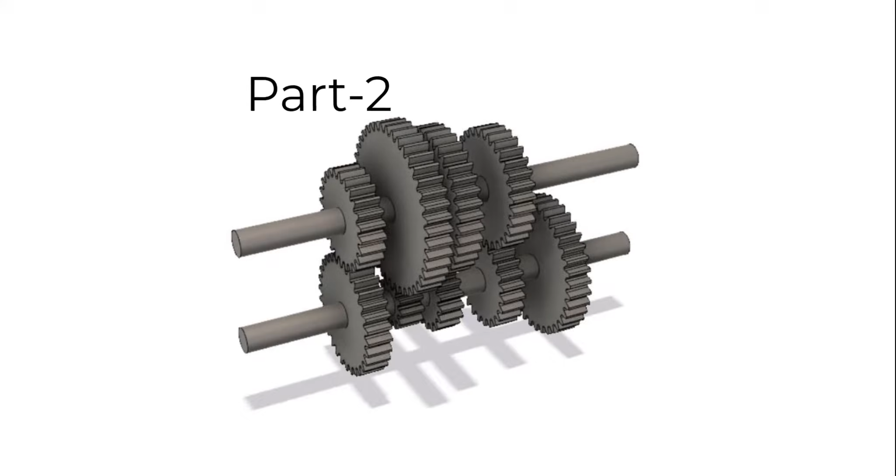This is part 2 of Constant Mesh Gearbox. If you have missed part 1, I strongly recommend you to watch part 1 now. You'll find the link in the description.

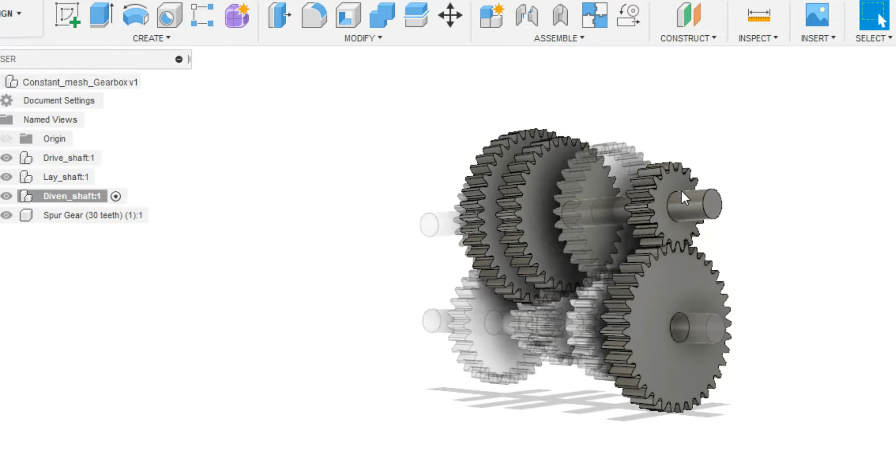We almost designed it. Just a few more steps left. Begin by activating the driven shaft and select the end face of the driven shaft. Then choose sketch. Draw a line. Convert it for construction after selecting it, followed by X on the keyboard.

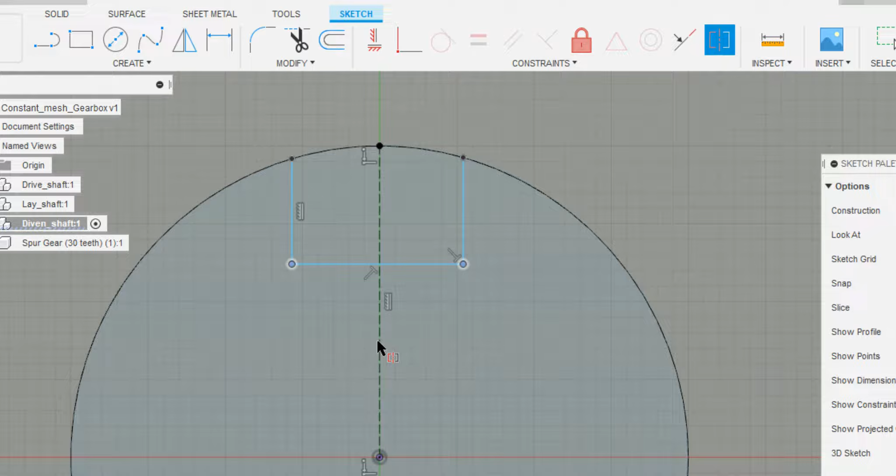Now draw the profile of the spline roughly. Make the profile symmetric from bottom. D on the keyboard. Let the length of the horizontal line be 4 mm and the vertical line be 3 mm. Now choose pattern under create menu.

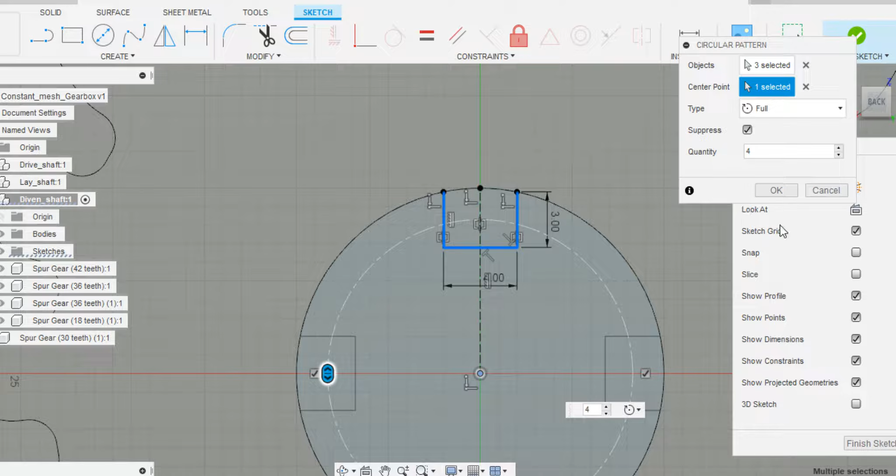Select the spline profile as an object and select the axis point as center point. The number of splines be 4 and click OK. Now select all 4 profiles that were created and press E on the keyboard. Extrude all the way to the end of the driven shaft.

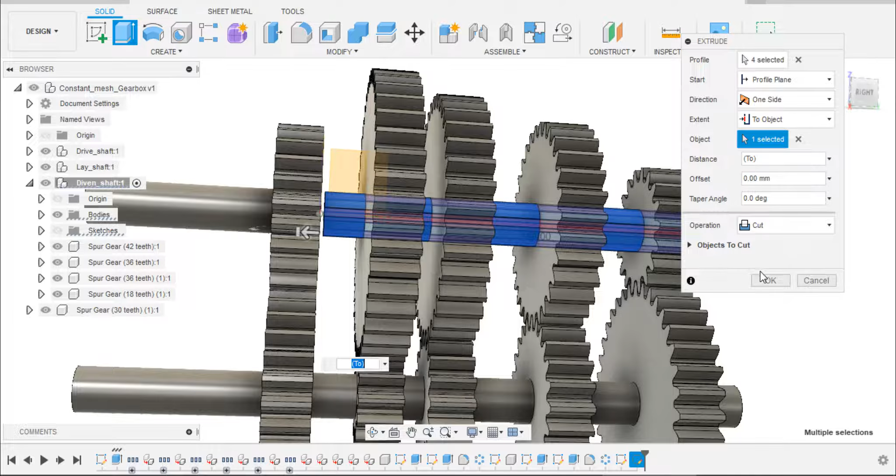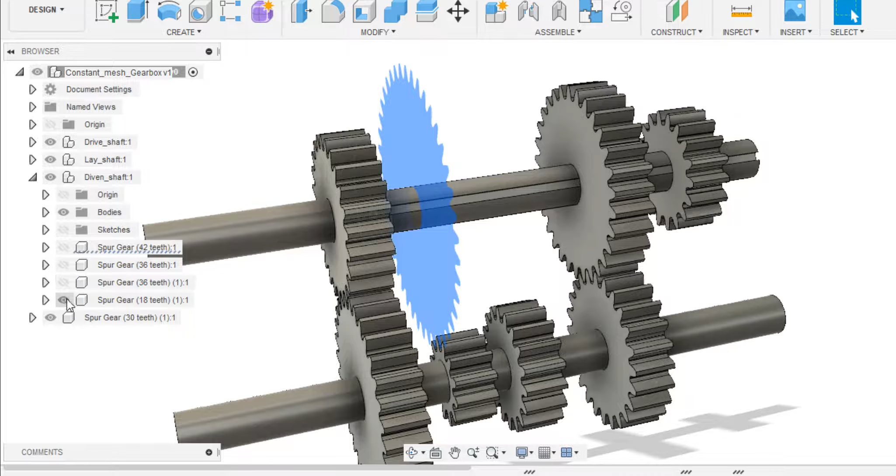Make sure that only one body is going to cut. Click OK. Activate the top level assembly. Now disable all the gears on the driven shaft. Move the component to the driven shaft.

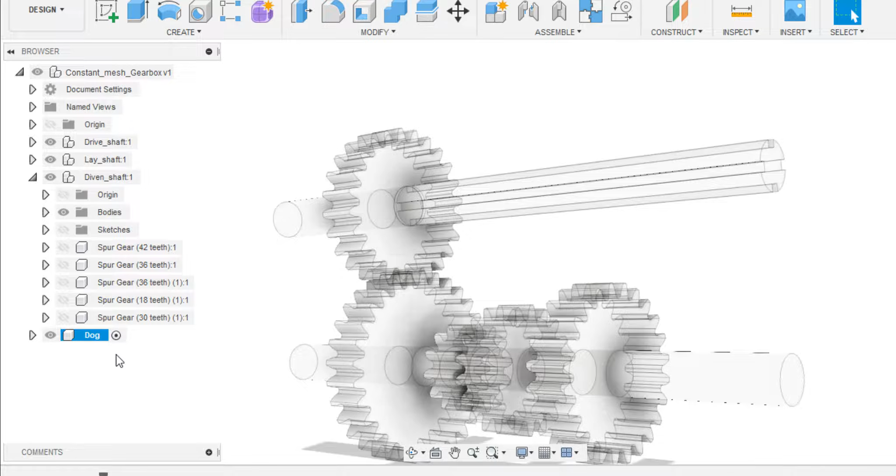Create a new component and rename it as dog. Select the other face of the shaft for sketch. If you are unable to select the face, just hover the cursor onto the face and hold the left mouse button. You'll get a bunch of options. Hover and select the desired face for sketching.

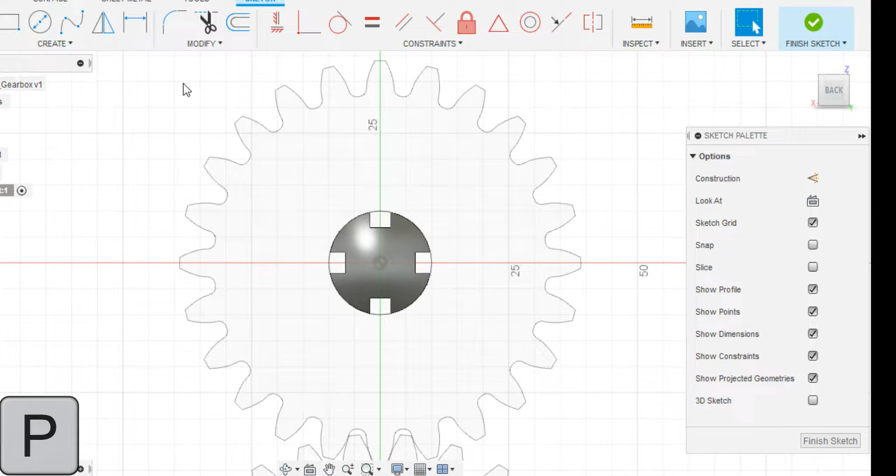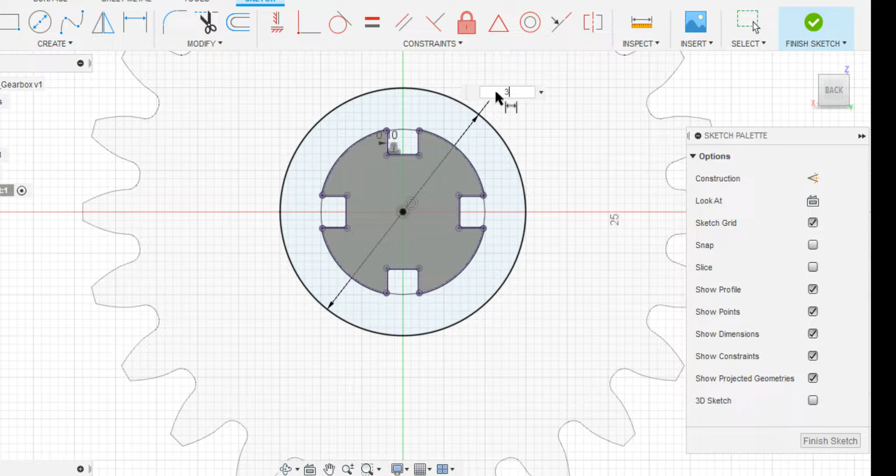P on the keyboard. Select the previous sketch profile and click OK. Now I want you to offset this profile to -0.1 mm. Then draw a circle. D on the keyboard. Let the dia be 40 mm. Pay attention here.

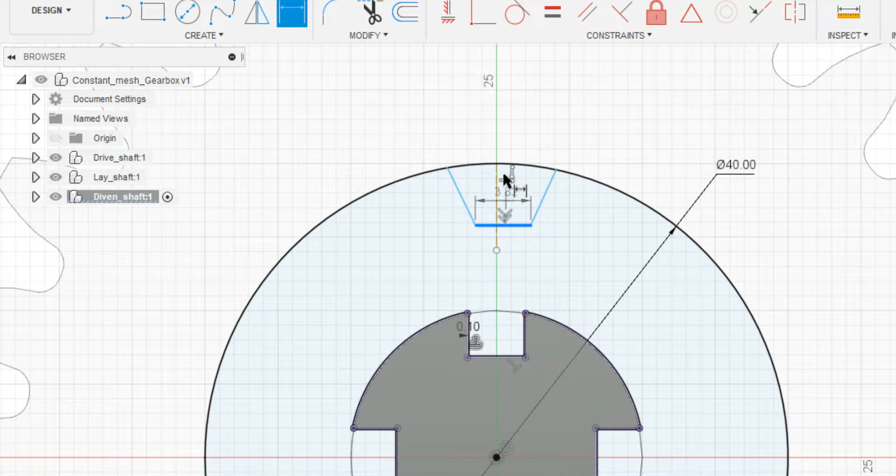Draw a line and make it for construction. Now draw a simple profile like this. Let the distance from bottom line and the top point in the circle be 5 mm. Make the profile symmetric from bottom and top.

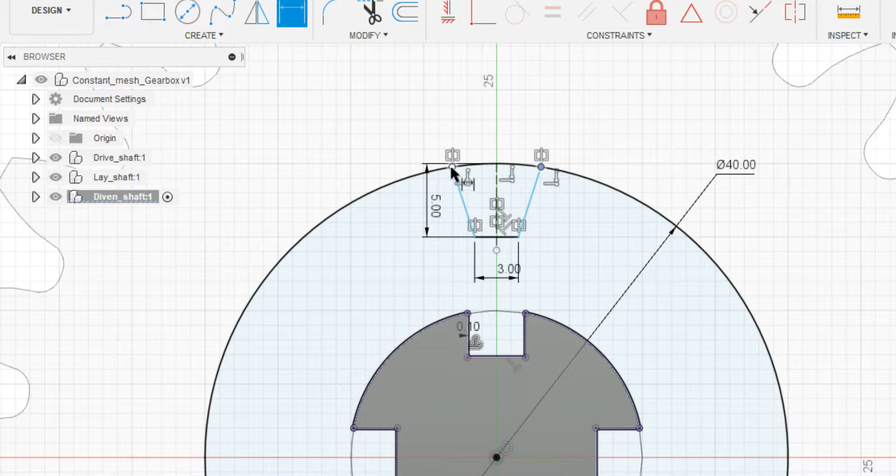Let the horizontal line length be 3 mm and distance from top points be 5 mm. We're done with the dog profile. Now select the profile and select circular pattern. Choose the circle center point as center point. The number of instances be 8 and click OK.

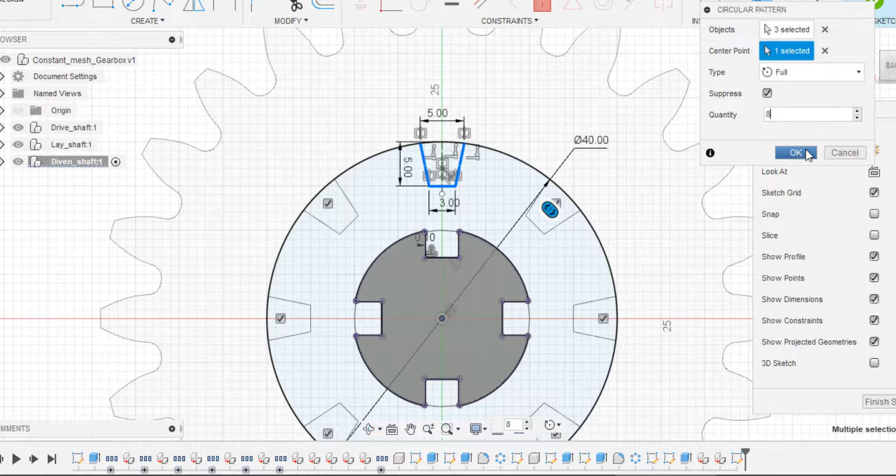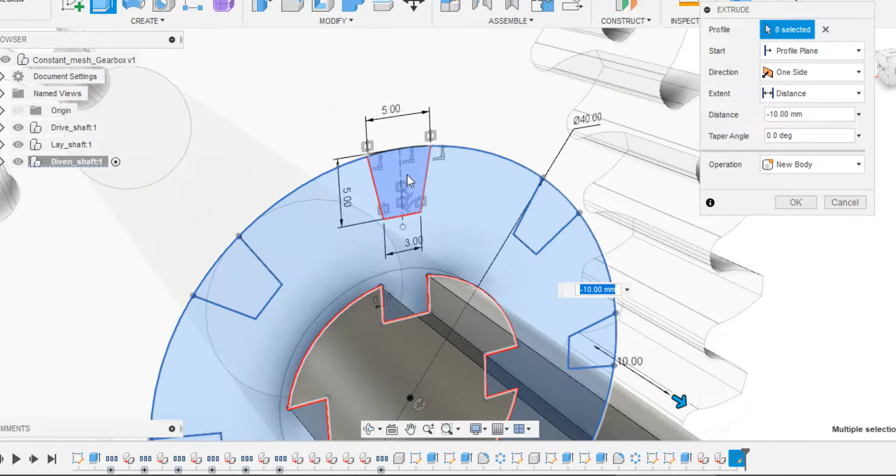Q on the keyboard. Select the inside profile, including the outer profiles for extrude. Let the extrude distance be -10 mm. And then click OK. Enable the previous sketch to create partitions on the dog. Hide the drive shaft to select the profiles more conveniently.

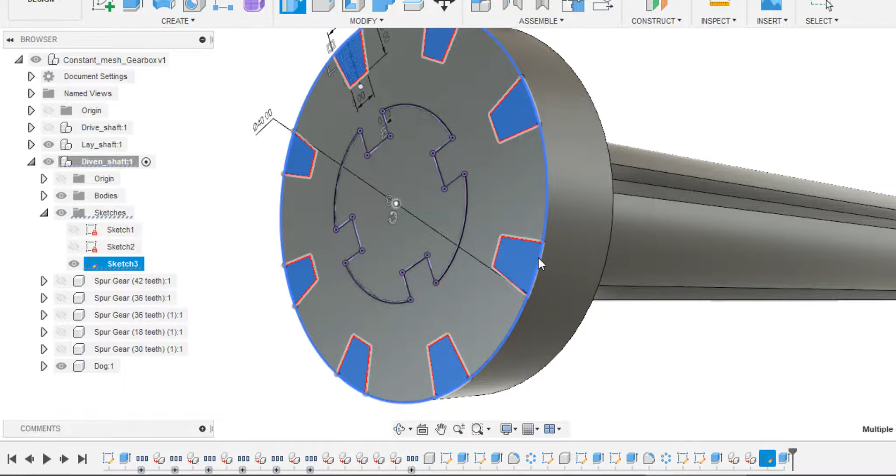Now select all the profiles and press E on the keyboard. Inside the extrude menu, under direction, set 2 sides. Select the manipulator and roughly adjust it. Make sure that the operation is joined. Side 1 length be 5 mm and side 2 length be 15 mm.

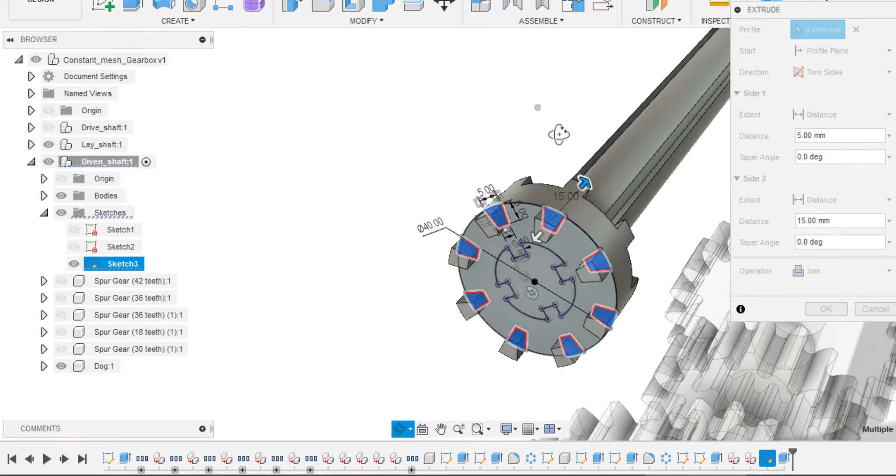Perfect. Now hide the sketch inside the driven shaft and enable the drive shaft. Now that we have created a dog with partitions, similarly we have to create some partitions on all the gears. Select the right side face of the gear on the drive shaft. Project all the faces in the dog.

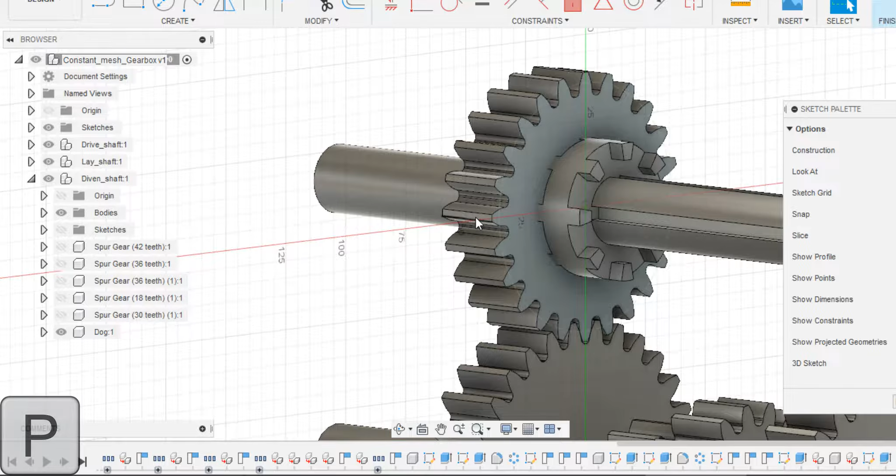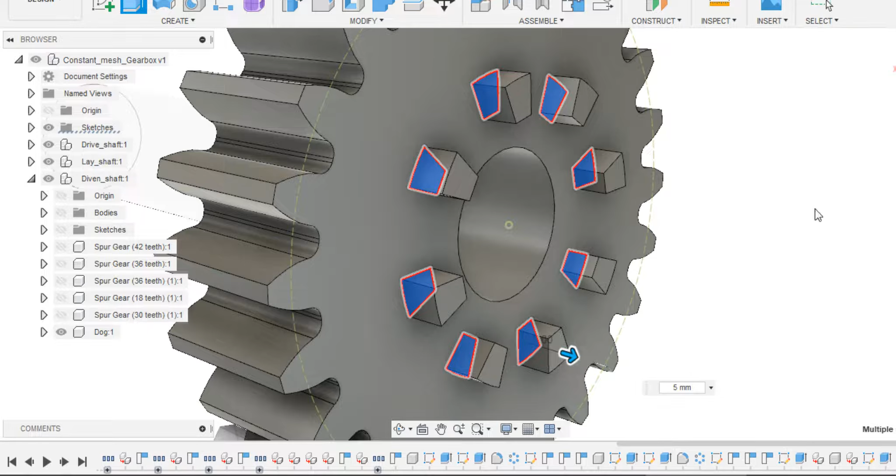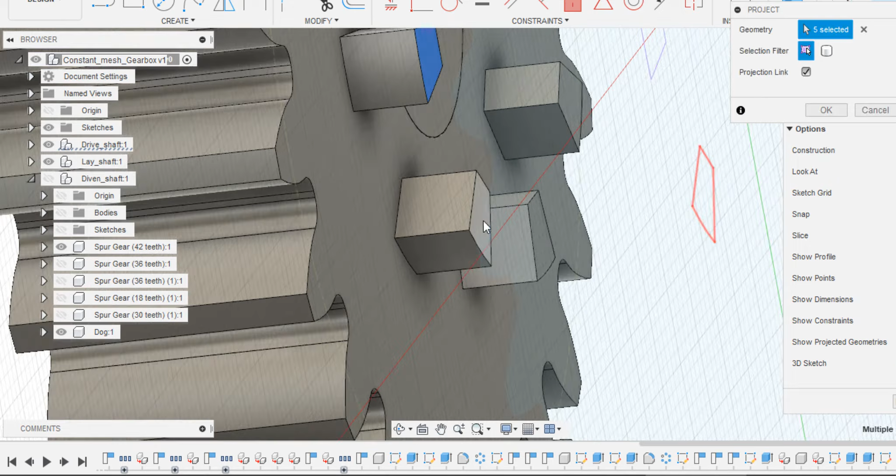Select the left side face of the gear for sketch and hide it for convenience. P on the keyboard, select all the faces on the gear and press OK. Now, select all the profiles which were projected on the gear. Press E on the keyboard for extrude. Let the length of the extrude be 5 mm.

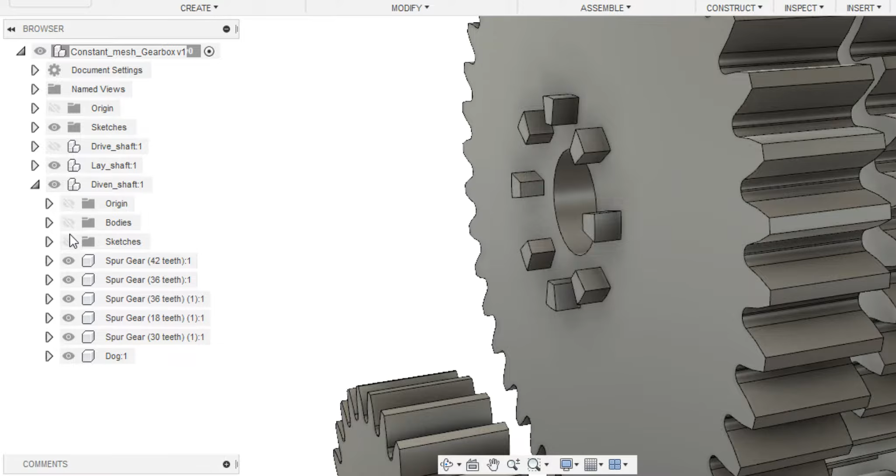Now, we've got it all. Enable all the components. Now, let's move all the gears a bit to make clearance. Apply selection filter only to bodies. Select all the gears except these two. Press M on the keyboard. Move along the axis of the shaft to a distance of -10 mm and then click OK.

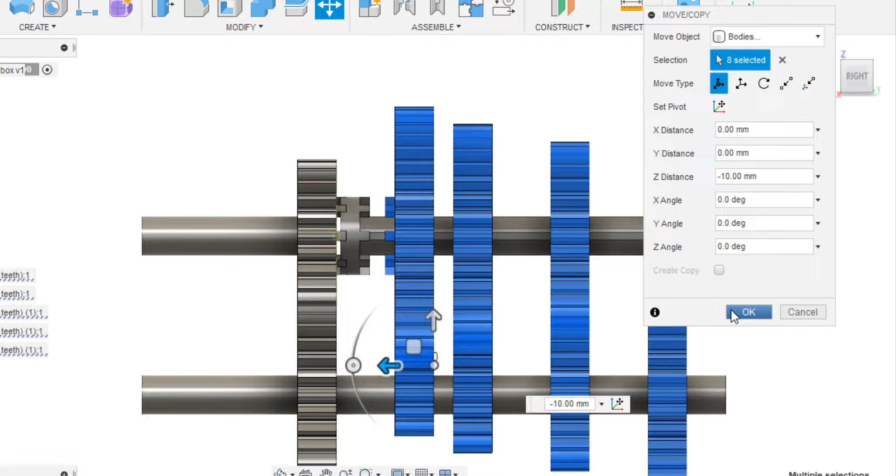Now, observe here, the dog is intersecting with the gear. Let's correct that by moving the dog a bit.

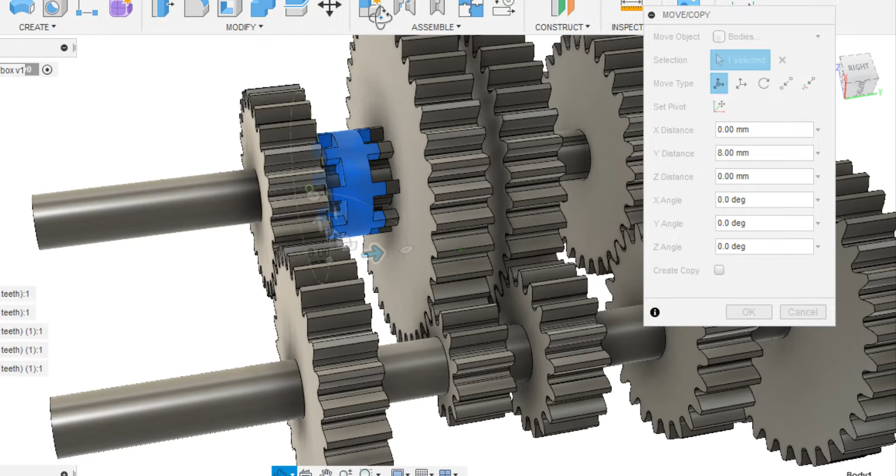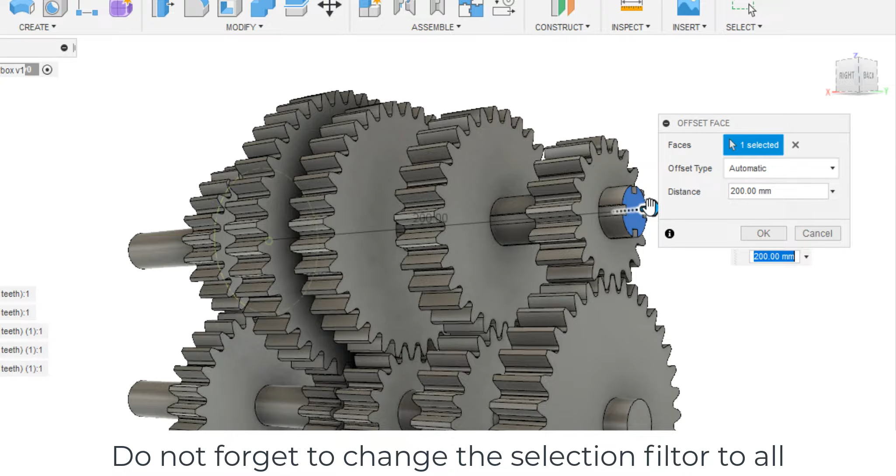Make sure there's a bit of clearance between dog and gear. Again, repeat the selection. Press M on the keyboard and the distance along Z-axis be -10 mm. Perfect. Now press O on the keyboard and select the right side face of the driven shaft. Hold the manipulator and try adjusting. The offset distance be 200 mm.

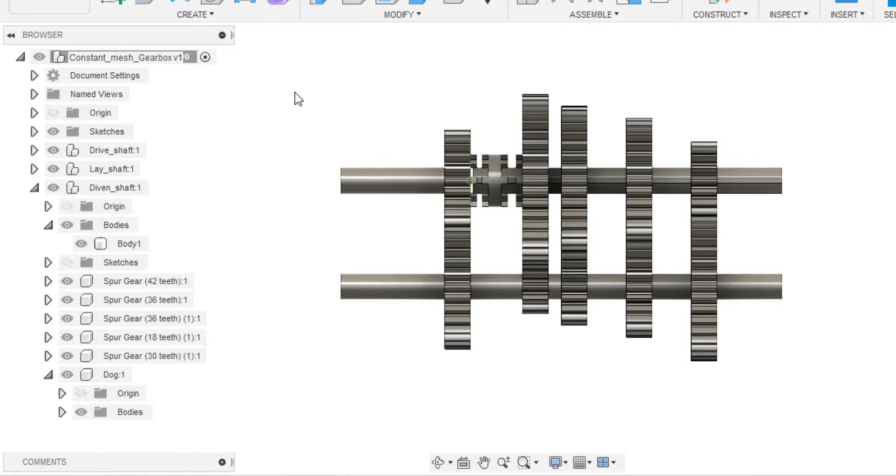Repeat the same offset for the lay shaft too, and click OK. Perfect. We've created all the necessary parts. It's time to add supports to our assembly. Create a new component under top level assembly. Let's rename it as bearings. We'll be inserting all the bearings from the McMaster-Carr components.

Under the insert drop down, select the McMaster-Carr component. Search for ball bearings. Units be metric. The shaft diameter be 20 mm. The width be 21 mm. We've got here our results filter. From these I would like to select the open one. Click on product detail to see it all. Under details, choose STEP and import file.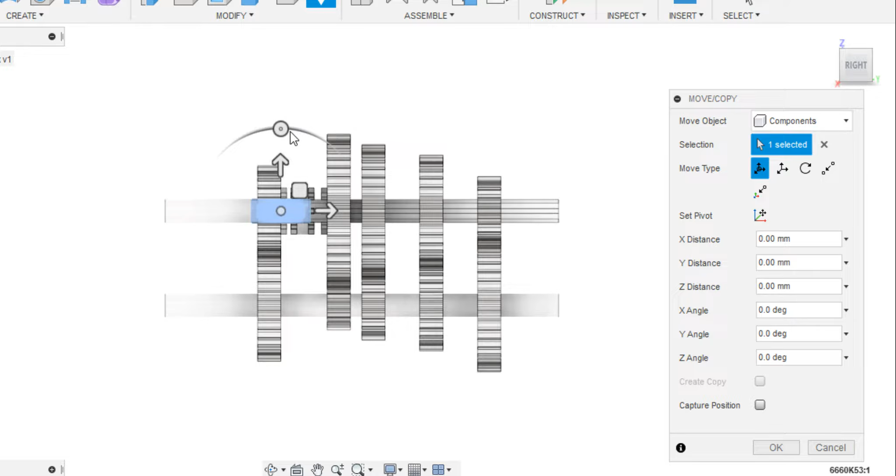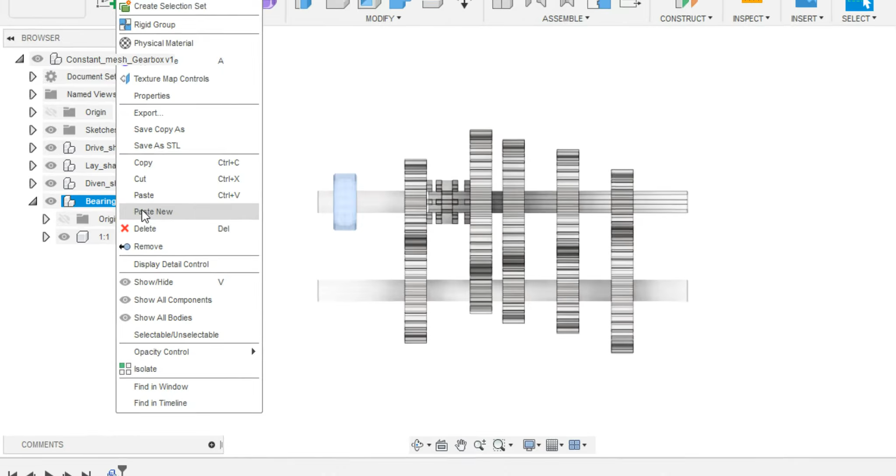As soon as you hit that save button, Fusion will import that bearing into your current project that we are working on. Using the manipulators, roughly position it with the axis of the drive shaft as center. Enable capture position after manipulating it and then click OK. Perfect. Rename the bearing as 1. Copy the bearing and paste it. Then position it on the other end of the driven shaft. Enable capture position and click OK.

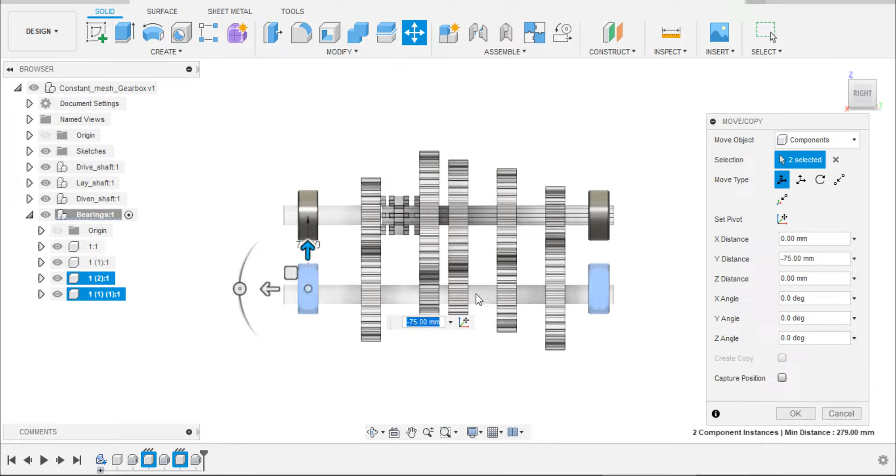Now copy the two bearings and paste them. Reposition them onto the lay shaft. Let the Y distance be -75 mm and then click OK. We're done with all the parts.

Now we have to assemble all the components so that we can see how they actually work in real life. We have all the components perfect with their positions. All we have to do is rigid groups and as-built joints. That's all. The rigid groups here are the bearings and the shafts on which they are mounted, right? Open the rigid group and select the shaft component entirely and then click OK. Repeat the same procedure for all the components, that is drive and driven.

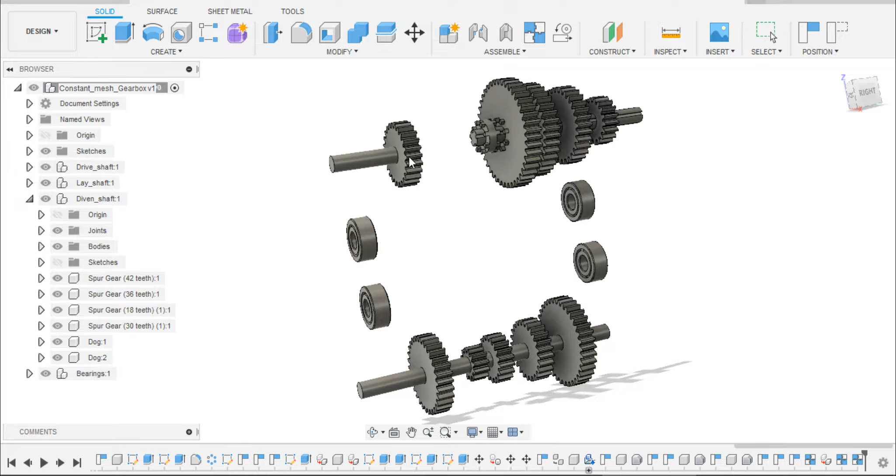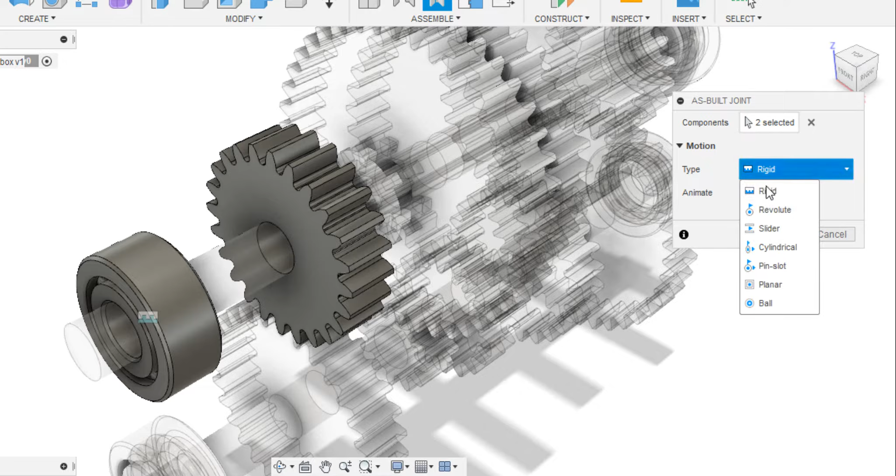Now if you move them, the lay shaft including the gears moves along with it. Now I want you to ground these bearings in their respective positions so that they do not move. Let's add an as-built joint here. Select the bearing and gear. Change the motion type to revolute. Now Fusion will prompt you to select the center. Choose anywhere on the axis of the shaft. Make sure that you pick the right one and click OK. Repeat the same procedure for all the gears and shafts.

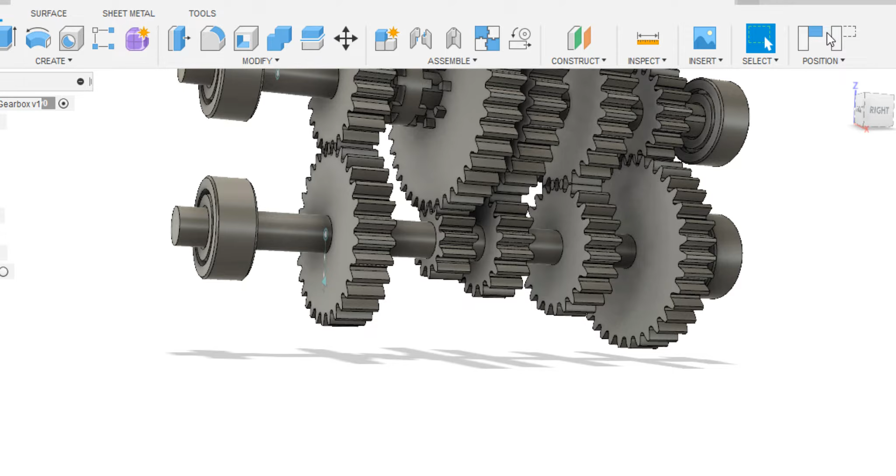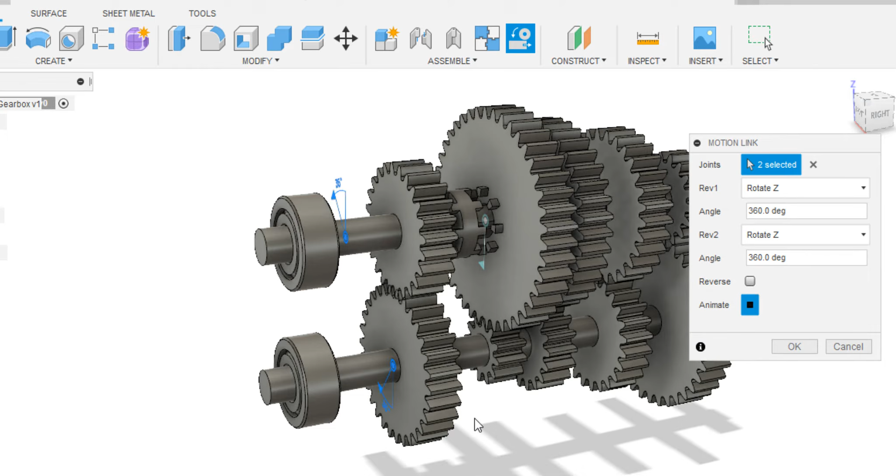Motion link. It's time to add a motion link between two joints. Before proceeding, let's understand what actually is the motion link. It drives the joint in a proportion so that the motion with respect to one another be like twice or thrice. It depends. Set the motion link under assembly. Select these two joints as objects. Let revolve 1 angle be 450 degrees and revolve 2 angle be 360 degrees. And then click OK. It means that if the gear on the lay shaft rotates 360 degrees, the gear on the drive shaft rotates 450 degrees.

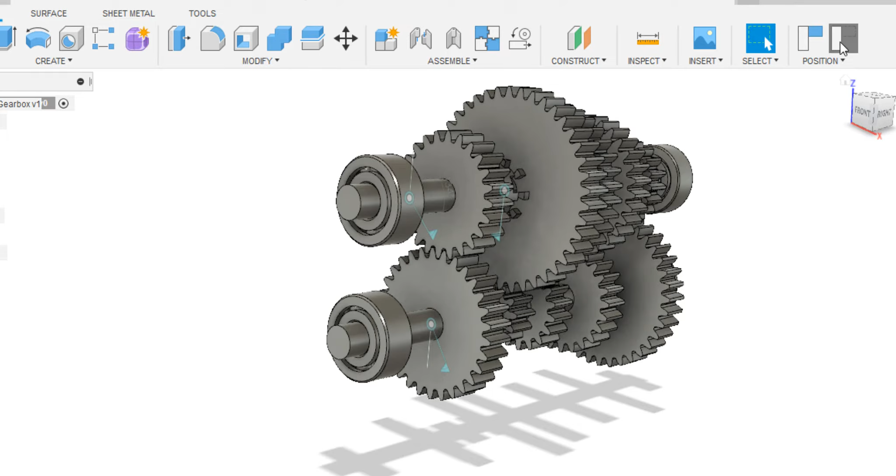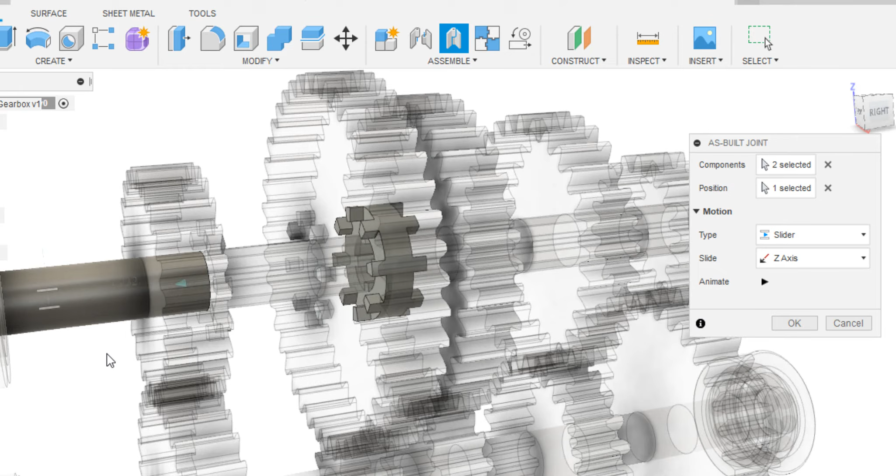Now we want this dog to move along the axis of the shaft for engaging gears. For that, select as-built joint. Select the two components and hover the cursor for positioning it perfectly. We do have to adjust the limits of the joint from history. The minimum length be -10 mm, maximum be 10, and the rest be -10 mm. Click OK if the animation looks perfect.

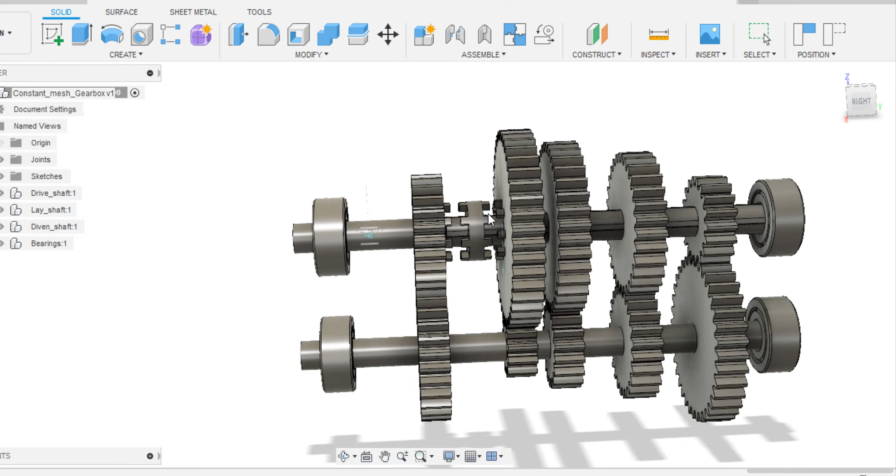Let's do some motion study for these joints. Add some angles at some intervals and play the animation to see how it's performing. Looks amazing, isn't it?